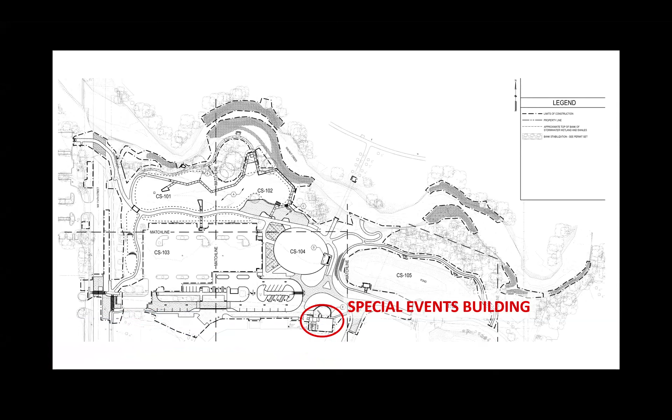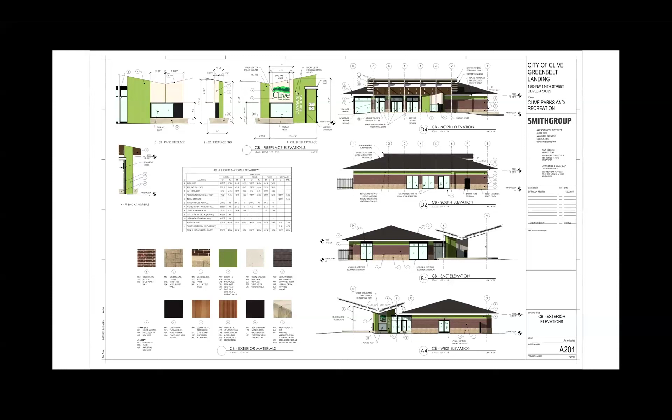The first aspect of the project is the special events building getting some renovation. Can you skip ahead, Richard, to the next one? This is the renderings of the building. I know we've also seen those in our video marketing in more of a 3D mode, but the improvements are largely off of the north side of the building, adding a vestibule area and then a rooftop screened seating area and patio. Next slide.

One of the outstanding items will of course be the construction drawings, review and approval. Those typically come in after the site plans are approved. So we'll have more details on exactly what is happening for stream bank stabilization once those plan sets are received. You can also see the creation of the wetland area toward the left of the screen and the boardwalk going throughout that area.

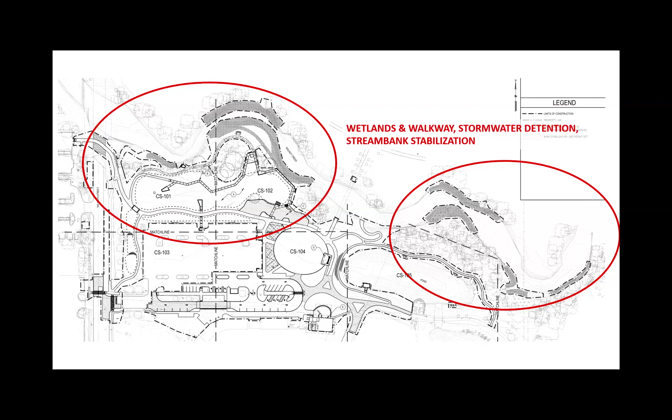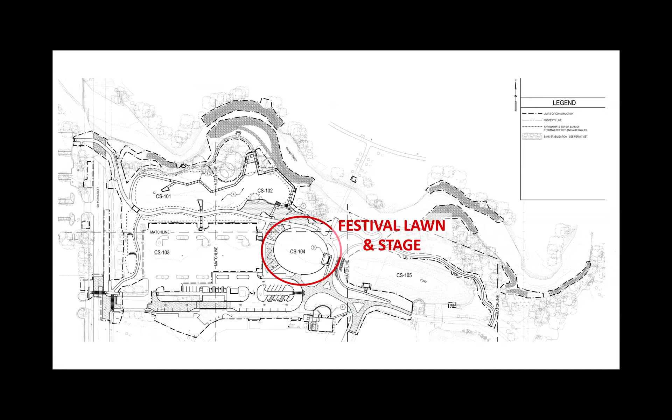Next slide. And one more there. The third big component of the project is the festival lawn and stage. That's the central portion right off of where the existing parking ends. You can see the stage here.

We have the 3D rendering, but from the plans, it is at grade, which is what is shown in the plan documents being approved tonight. The other rendering was from some of the promotional materials, but it'll be a nice lawn space and stage for events like Clive Fest and other community use.

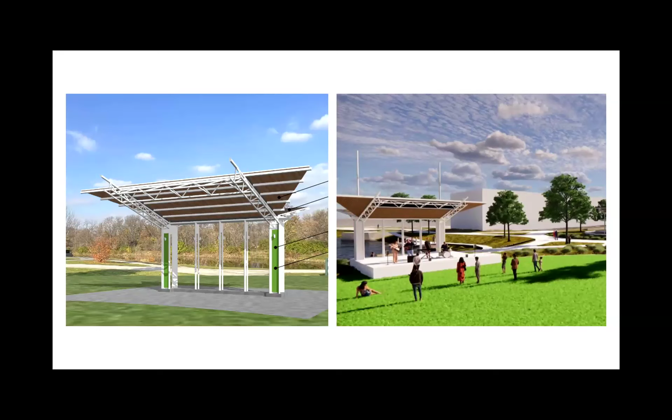Is that stage elevated then? We're seeing a couple of different things. In the plan set, it is not shown as being elevated. Part of it is doing a little bit of grading, so it's a little elevated, but not fully elevated like that. Part of that relates to being within the floodplain and the floodway, where we have to keep it as low as possible so we don't create any additional obstructions. Have we thought about any consequences with that? I know SmithGroup is working really hard to make sure it does have a little elevation over the rest of the lawn so that it's not sitting flat.

Richard, there would still be an opportunity to have temporary risers for certain types of shows if that was needed. Yeah, absolutely. Or the lawn grade itself going up a bit. Yeah, it looks like that on the right side. I know that's a rendering from the promotional piece, but it's part of how the grading is going to end up ultimately, so I think we should be okay from the perspective of people viewing concerts and things like that.

And that's my concern too. I want to get away from having to rent risers or stages for this. That's one of the ideas behind the whole concept, getting away from having to do that annual rental. Yes, and that's the intent, that we won't need to rent them for that, but the stage will allow it if we need to for some reason, or if we need to extend it out front for a bigger concert.

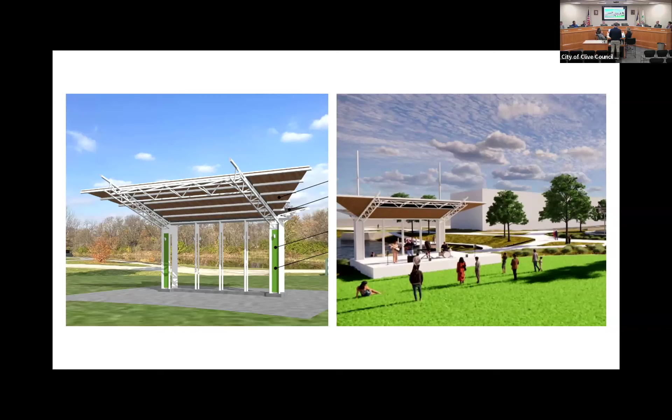Okay, so I'm not hearing any additional questions on that area. So one more click. And I believe we were talking about the playground location.

It's a quite large area. The site plan sheet that shows the whole site is fairly small, but there's a zoomed in view that shows, I believe at this point, a concept for the playground equipment. I'd have to defer to Richard to talk about which specific structures were selected to be put in there.

You can see that's the area it's located off of. There's some seating nearby, just off the festival lawn. It is near to the parking, as well as to the trail, so it should have good access for families and others using the space.

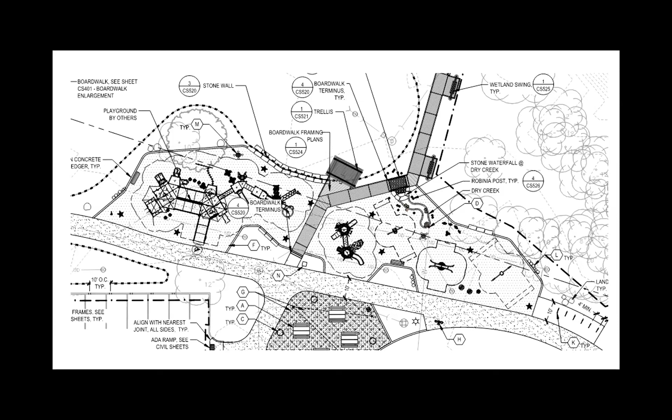Richard, I know we've talked about the concepts and the equipment on there. What kind of input did we get from the community on what we chose for the playground?

So we haven't had any specific conversations with a wider community on that. What we did, at least from the perspective of all-inclusive, all-ages, all-abilities, we worked with a designer that specializes in designing that type of playground to make sure we hit all the different elements—people with physical or other types of disabilities, people that have trouble walking, how people of all ages from half a year old to 80 years old can interact with that. So we did work with them on that type of design, but we haven't done a specific public meeting on what people would want to see in it.

Is that the Ashley Okland? Yep, correct. This will be the largest, I think—actually pretty close—all-inclusive playground. And I'll have renderings in a few more slides after Amanda's done her slides.

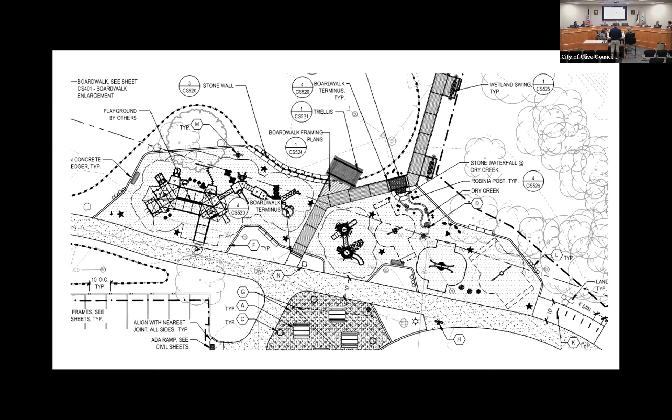Can we take a step backwards and go to the stage area? I really want to focus on—no, you can go to that next one, the parking lot. I get it. I understand the parking, I understand at the festival we don't have enough parking, but that's always going to be a problem regardless, right? Absolutely, for a big event like that.

Do we really need that much concrete? It seems like we need more grass and grounds, and we can park folks to the south and across the street—you're doing that anyway. So do we need all that concrete sitting there for 98% of the year? It's just running off into the creek. Can't we creep some green space into that parking?

I would say there's not actually very much additional concrete with the parking lot. It's more in how it's oriented and how we're improving the function through it. To the main extent, it actually almost extends all the way down to the special events building now, but it's not very easy to use—it's difficult to get there. So most of the work we're doing to the parking lot is increasing the functionality of how it flows. It looks like a little bit more concrete in how it's broken up and how we get that turnaround by the special events building, but from a functional standpoint, it's not a lot of additional concrete.

I'm just talking about the concrete to the north of that parking lot, not the new flow, because the flow today really stinks. Yeah, absolutely, we get that—big need. But the concrete to the north, I don't even know where to tell you—straight over from CS 104, and you come over—that concrete's never used, maybe 2% of the time.

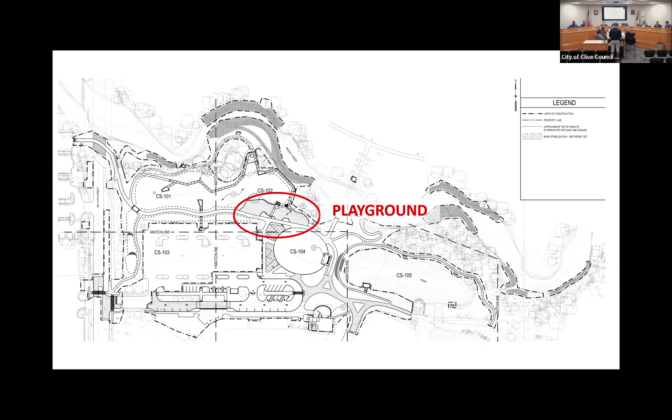And of course the boardwalks within the wetland areas are also a pedestrian addition, but we've already discussed those. So with that, this is a really exciting project with lots of great things to help enhance the area.

We did have discussions with Richard's team for the Parks, Recreation and Public Art Board on this project at their meetings in September and January. The Planning and Zoning Commission considered the site plan at their January 4th meeting and recommended approval. Staff did not receive any comments through the site plan process.

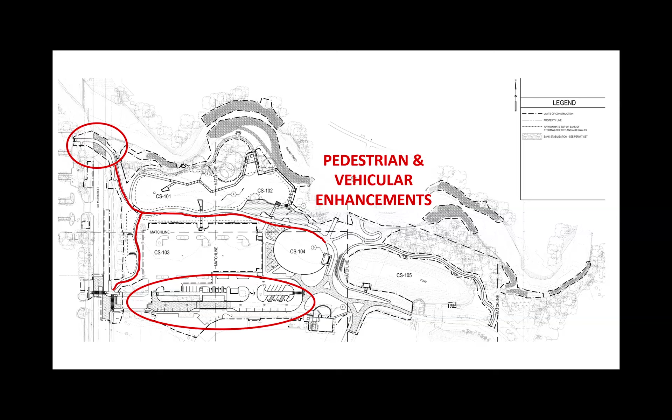I'm sure Richard may have comments on the other engagement they've done. With that, staff does recommend approval. The outstanding comments in the comment letter are all additional details that will be addressed with the construction drawing submittal. This project is a little different in that it's really all public improvement, so some of those details are still being finalized for the final review, but the site plan is not expected to have any significant changes.

Excited about the whole project, but on the building, I think there are some great enhancements. I think we're going to see more rentals for the space as we look at the enhancements to the outdoor space, like the outdoor fire pit. In addition, what are we doing on the inside? I know we're doing some modifications there—Rich, could you talk more about that?

Yeah, I'd be happy to. Actually, that's the first item on the project update. That's a perfect tee off. So Amanda gets the boring construction drawing and site plan documents—I get all the color and fun stuff here.

So the first one is the community building renovations. This gives you a feel for what it's going to look like coming in from the parking lot—the existing building on the right-hand side and the new covered patio to the north of it. A couple of things are different from how it functions now. If you're paying attention, you'll notice the band right below the roof on the aquatic center is blue out there now; that will be transitioned to a green tile as part of this, to tie more into the city's brand and colors.

A couple other things out here: we're going to move the main entrance from the side, which you can see is the restroom sign door there now.

That will become a public restroom for both facilities, and when it's not being rented, it'll be able to be used by the public. The design allows us to separate that use. And then the main entrance will be straight in here with a new double doorway.

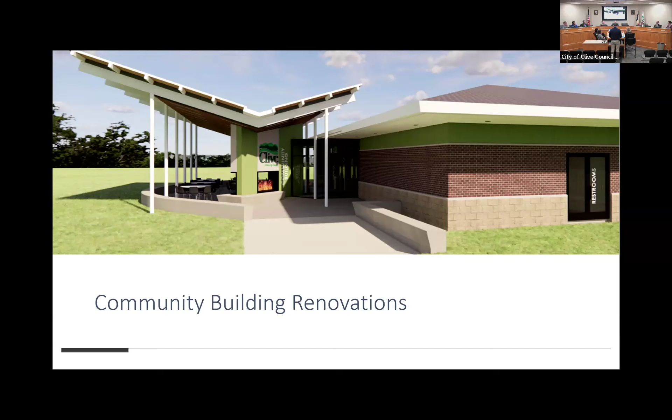So for what you see here, we wanted to at least put a standard name to it, again moving away from the special events piece. Community building is what a lot of communities are used to calling their main community center, and we wanted to see what opportunities we'd have in the future for that to change. But it was very important for us to have that visual change too, to make it easier for people to know where the building is at, because that's been a struggle since it's been built.

From a fundraiser perspective, have we thought about, oftentimes they'll have bricks where the public can buy a brick and put their name or their family's name on it? Have we thought about any opportunities to do that as well?

Save that thought, because you're going to hear related to the wetland walkway. I don't want to get ahead.

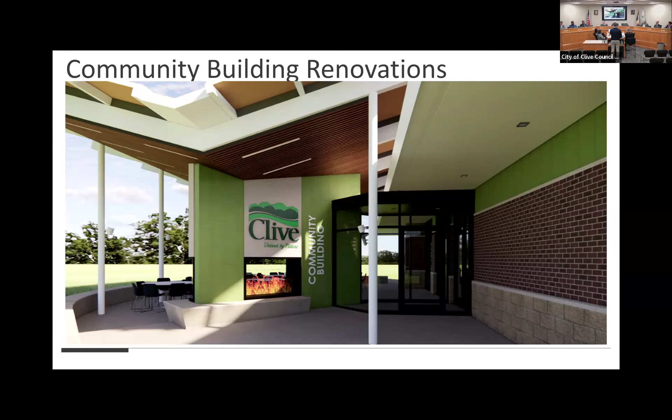Weaver, you're looking at the patio, right, and how it orients out to that parade field type thing so that onlookers can watch me whoop you in bags in the future. So keep that in mind, the permanent bag section, at some point.

One thing I'll say before moving on to the next part of the project, this plan overview shows the doorway here, so the restrooms can be separated from that, open to the public. You can also see what that little seat wall does to define that room as part of the space.

In most weather, it could effectively double the amount of space the building can have for people and events. Right now, our capacity is 120, but you could easily have events with 200 people show up and not feel crowded. So that's a nice space.

That wall also helps define it from the rest of the site, so it feels a little more private if you're renting the facility. It also provides more seating too—it's basically a seat wall.

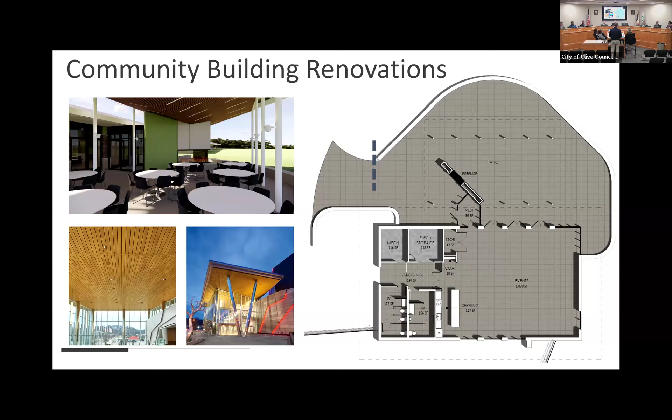So moving on to the stage and festival grounds, this gives you an orientation of how the design of the stage itself mimics and works together with the new patio over the special events community building, whatever we're going to eventually call it.

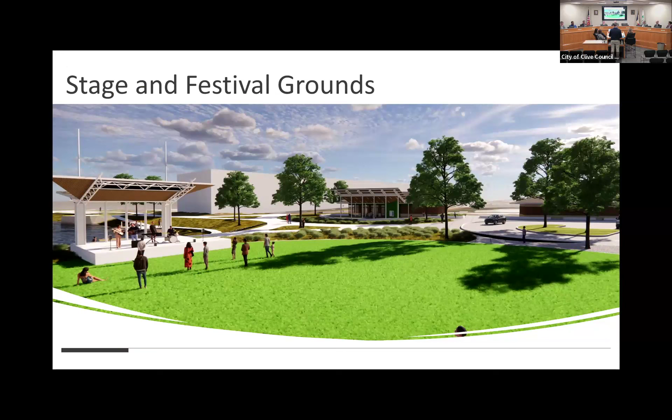Greenbelt Center. Then moving to the west-northwest here, this is the wetland and wetland walk area.

Amanda talked a lot about this, but it'll be a really great experience in a lot of different ways that doesn't exist within our park system. There are very few experiences like this within central Iowa, and it'll be a nice, unique attraction that brings more people to this site. Part of this is creating this place, this community.

It's been very one-dimensional up to this point with the pool. This will start to take it further, where maybe you come to the pool, go outside and have lunch. We might invite ice cream trucks over the lunch hour during a hot summer day. They're out there playing on the playground right there, or maybe they want to go for a walk.

On this wetland walkway. The cool thing about this is there's going to be a lot of different places to sit, interact, and give you different views of the creek, of the greenbelt. You're going to get different experiences.

There are places where you'll walk through the mature trees that exist out there today and will stay after this is over. You'll be able to get down—most of that wetland will actually have standing water throughout the year, and the boardwalk will get within 12 to 18 inches of that on a regular day. So you'll get different experiences that you don't get out there today, or pretty much anywhere in central Iowa.

So it's going to be a really unique opportunity that starts to extend the amount of time and people that come to this site and really can enjoy it throughout the year.

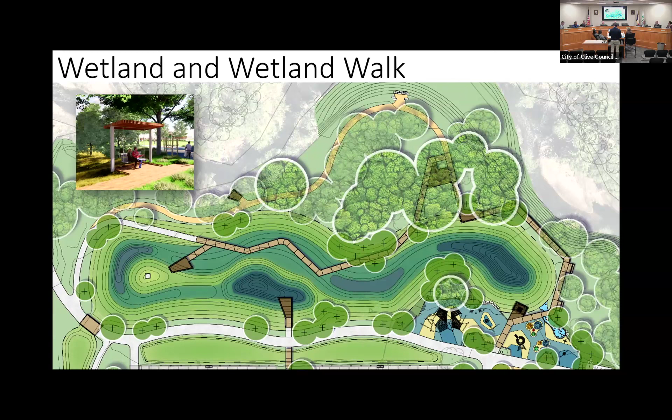Which one's the fishing pier, Richard? The fishing pier will be located off the pond to the east of the stage. So no fishing pier here, but it'll be just to the east of the stage. You looking for the boat launch or the fishing? The fishing, but that's right behind the stage. Yeah, so the pond will actually be where we do the fishing pier. Then it'll be fully accessible, so anyone can get down there and it'll really be a nice amenity.

And Michael, you said the boat launch, that's part of the Icon Trail. Yes. How does that fit into this whole equation? I'm not sure, actually—I'll go back real quick.

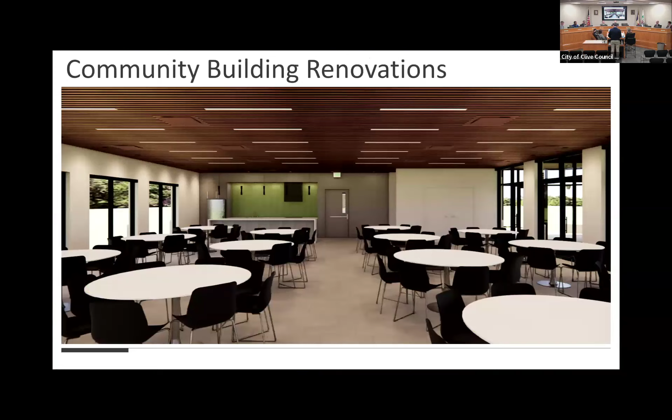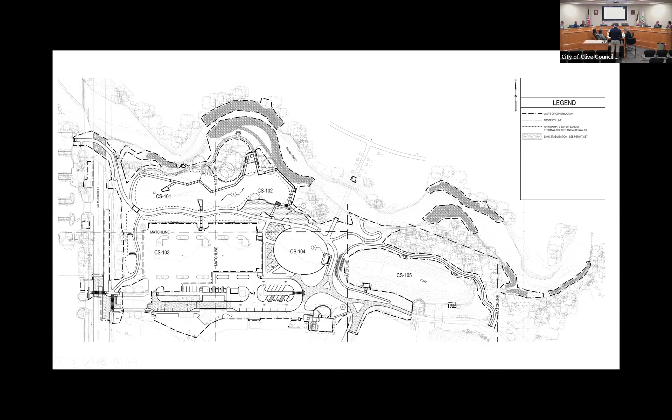So here's the wetland walk and the boardwalk there. Here's the bridge that currently crosses Walnut Creek, the trail bridge. The creek access, kayak launch, tube launch—just access down to Walnut Creek—will be just off the end of that, winding its way down and dumping out into Walnut Creek. The cool thing is the way the sandbars have set up, this will just end at a sandbar that's typically out there most of the time, so people will be able to get out there and explore, providing a nice opportunity to access Walnut Creek. And the fishing pier is right here at the southwest corner of the pond.

One thing I'll mention too, is the Polk County Wetland Walkway, because they've sponsored that. It's the MidAmerican Stage, they've sponsored that. And then the Polk County Festival Grounds. And the launch is Icon, and they didn't actually ask for any naming recognition, but they paid for it with their grant. They don't have any naming rights to it, but that was supported.

And then we also still have, as Richard will get to at the end with all the fundraising that's been done, a public art grant from Bravo and Icon to tie with the MidAmerican or CMIC grant or donation related to public art. So some pretty big partners.

What do we have left then, Matt? He's got his last slide covers that. So that'll be in my pitch for the last couple bucks. That's right, a couple slides ahead of everyone.

So Amanda alluded to the rendering for the playground. This is the proposed playground out here, again working to go with the Clive theme and some of the nature. So we picked colors that weren't too bright and obnoxious, like you can see, and there's nothing wrong with that, but it just felt like that was the right place for that out here.

So picking a theme that really works with the Greenbelt and the nature, and then also tying back into the Greenbelt Master Plan districts. So this being the Oxbow district, we're really trying to look at, even with the musical play, having it mimic natural things like mushrooms and flowers and those type of things.

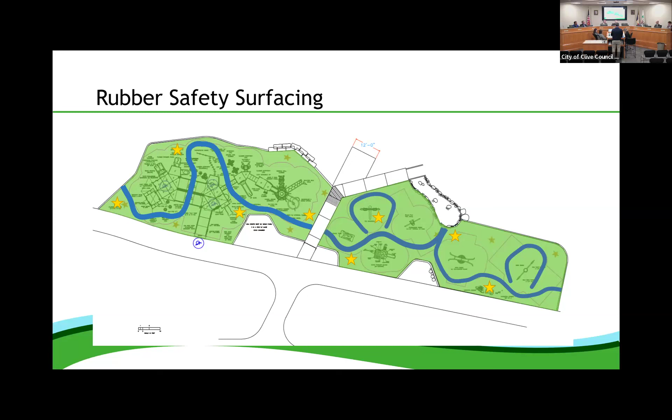So the next element of this is the food truck grove. This is an area just on the west side of the event lawn, and it basically parallels that east edge of the parking lot.

This is basically a little informal seating area with some permanent picnic benches out there, some kind of cantina style lights that will hang from poles just above that. It's a place that people can hang out during events, or if they just want to come have lunch. Hopefully this will be right next to where we do the food trucks, so that can mingle back and forth with people, inviting more food trucks and more people to come out, creating that larger community destination on a regular basis.

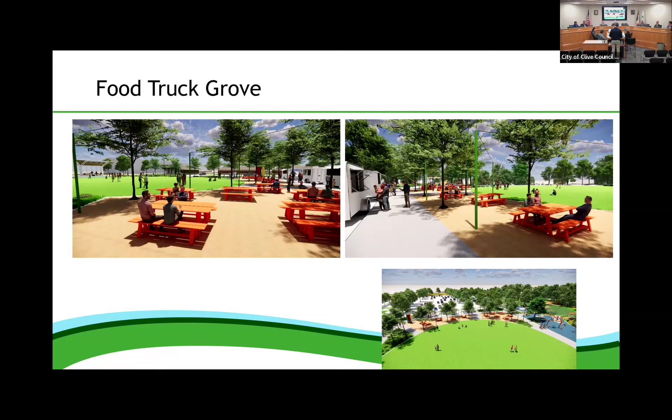So kind of jumping into project budget, like you asked about. Total, we're still sitting at the $10.6 million estimated cost for that, all design, contingency, all of those things. Total funding, we have well over 9.5 million committed right now. We're actually probably closer to the neighborhood of 10 to 10.1 of committed dollars, as well as in-hand funding from the city's funding and grants that we already have.

This is a list of all the major donations, grants, and partners that we have on this so far. You can see, like Matt talked about, the estimated cost of the playground from the in-kind donation from Variety. We have grants from Iowa Finance Authority, EPA for their water quality grant that Pete was able to work with our congressional delegation to get approved last year.

I wanted to note the Clive Community Foundation and all the effort they've been putting into this. While their contribution doesn't maybe come as direct dollars from them, they've been instrumental in making connections in the community, getting us in doors, and really helping. Their commitment was 300,000, but really what they brought is a lot more than that, either through in-kind donations or help at events, opening those doors. Then you can see it goes all the way down to the $5,000, plus an additional 75 on top of that in smaller miscellaneous private donations, which gets us pretty close to where we're at.

Matt alluded to it, we're working on hopefully one final naming rights donation for the outdoor plaza that we can bring forward in the next month. We just submitted another grant to Destination Iowa for $500,000. We hope that if either or both of those are successful, it's really going to set us up for 100% success on this, and get us right out of the gate when we start construction.

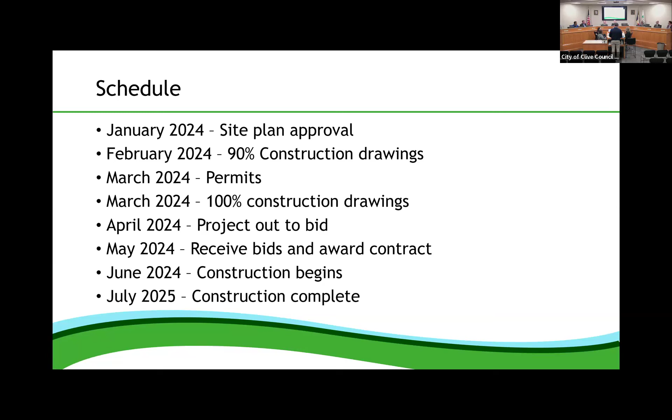With this construction schedule in mind, have we agreed on a final place to hold the 2024 Clive Festival? Yeah, that is the last thing. One of the things we thought about this whole—it just shows we anticipated the question.

One of the things we thought would be a possibility is that we could maybe have it at our current location in 2024, but with the parameter of not being able to do any parking lot work during the pool season, we didn't want to throw an additional restriction on there, especially because it'd be more important for us to have it completed and ready to use for the 2025 Clive Festival.

So our recommendation is that we move up the hill off of Campus Drive here for the 2024 season. This is just our first run at how we think that layout might work.

Up along that section, we'd close down Campus Drive from 114th over to the access into the gravel parking lot area. That's where the portable restrooms and food trucks would be. We'd have the vendors just south of that, and then this would be the festival area with the tents, the stage, and the beverages and other things you can purchase, or people you can stop by and talk to. Inflatables will be up here, and the slip and slide would continue to be at its typical location right here.

Actually, it gives us a little more room than we typically have down below, so we'll be able to spread out a bit, but it still works very well. We can still utilize all the same parking areas—the aquatic center lot and all the surrounding lots. The fireworks can still stay at the same location and might actually give people a better view being up on the hill a little bit, but I think it'll work out well for 2024.

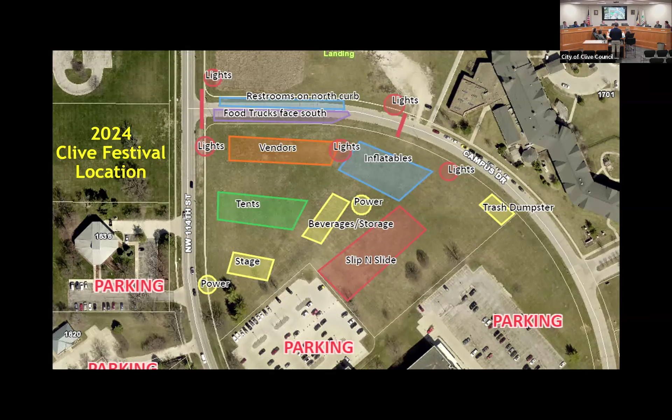I'll move approval of the site plan. Second. Further discussion? Seeing none, will the council please vote? Clerk, please post that vote. The site plan is approved by a vote of 5-0.

Continuing with Amanda, we have the Clive Development Standards Manual.

Proceed, Amanda. Yes, sorry, I was getting reconnected there.

So tonight we have to present to you the final version of the 2024 edition of the Clive Development Standards Manual.

This manual was last updated in 2000. So really the idea behind this update is to modernize some of our requirements because there have been changes in material standards and technology, as well as to address discrepancies we've had with various policies and changes over the last 20 plus years.

Additionally, we wanted to make it a little more user friendly, add some graphics, make it easier to navigate. So we've been able to bring in linking to other resources we reference, things of that nature.

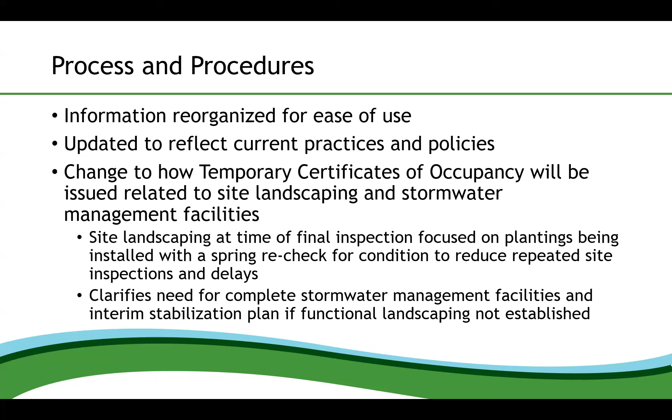The other sections are all related to the requirements and standards. So signs was a big one that we've talked about before.

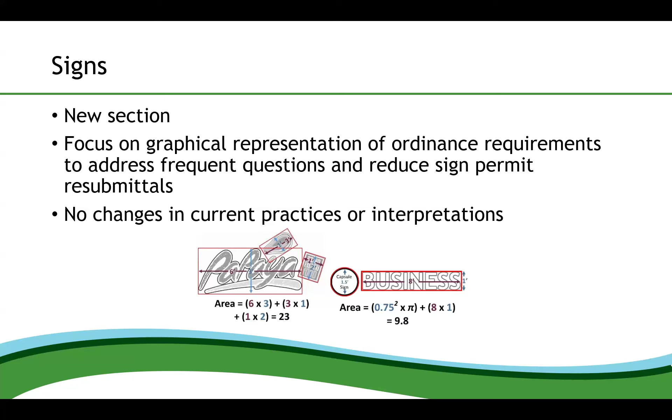This is a new section to the manual. The ordinance requirements and our interpretation policies are not changing at all from what we've discussed previously with the recent sign ordinance amendments. This really is just getting a lot of graphical representation, photo examples, things of that nature, to respond to the most frequent questions staff gets and the things we see as most often requiring a plan set to be resubmitted, causing multiple reviews on sign permits.

Site lighting, we've also discussed somewhat previously with various commercial site plans. So 20 some years ago, we didn't really have LED lights everywhere, so this update is really in response to getting to the current technology. We've also provided additional information on what to include specifically on plans with the development submittals.

That was another area where we were frequently having a lot of back and forth because applicants just weren't getting all of the necessary information together for staff to review the lighting plans. And we have been using this recommendation, or what we're recommending, with developers over the past year or so, and we have found that they've pretty much all been willing to implement that.

And we've been able to more or less ground truth that these are reasonable lighting standards to minimize the negative impacts on adjacent properties, particularly residential, while also keeping in mind that it is a suburban context that does require site lighting for all the vehicular travel.

Landscaping and open space. Again, this has all been reorganization and clarifying. There haven't really been any content changes, and that's because staff has not updated the landscaping ordinance yet in the zoning chapter, so we can't use a policy manual to change an ordinance requirement.

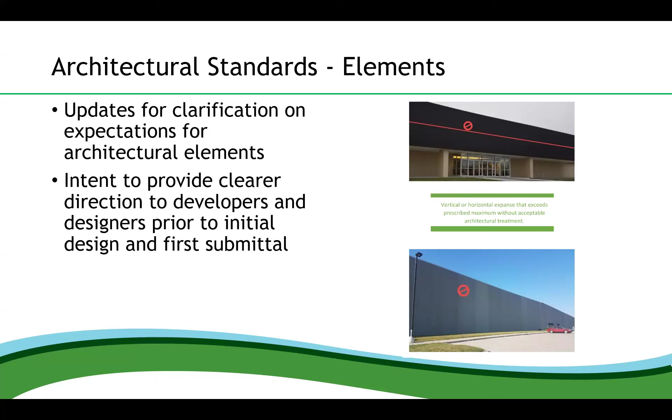So we have, again, a lot of visual examples in this. You can see a couple examples of the style of large expanse walls we do not want. And then it gets much more detailed into calling out different features and ways those can be utilized to break up the big massing on some of our suburban buildings.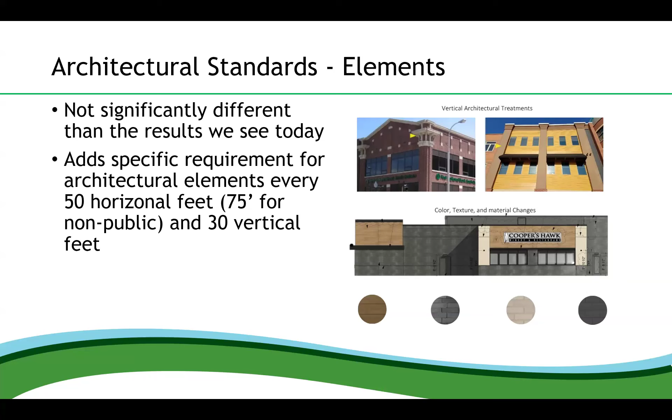The other big portion of the architectural standards is the exterior materials. Our current code limits new development to utilizing brick, stone, or similar substantial material. We get a lot of questions on what similar substantial material means - can they use Nichiha, can they use EIFS products, a lot of things that are not as robust as brick or stone, whether natural or manufactured. So our proposed manual is actually providing additional flexibility than what our current language has today.

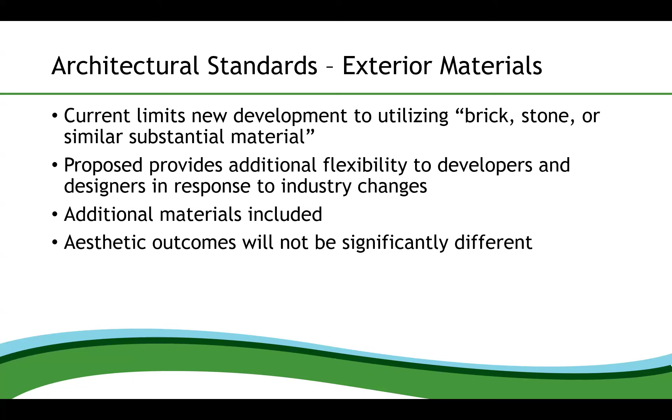We've included additional materials in our explanations of where those should land as far as a primary, secondary, or trim material. And again, the aesthetic outcomes are not intended or expected to be significantly different.

Additionally, staff has researched the ASTM material standards and found specific requirements to ensure things like thin veneer brick, which is now a much more robust material with better installation methods than it was 20 some years ago - however, that's if it's a fired brick meeting certain material standards, because you can still get an inferior quality thin veneer brick marketed for outdoor use. So we've put in specific requirements to allow those materials to be a primary, so we can ensure we're still getting the long-term durability and value out of them.

Now, I think many of you may be aware that there is a bill in the Iowa Senate right now, SF 174 I believe, related to exterior design elements for residential buildings, which does include multifamily up to 12 units. I don't think there's currently one with language addressing commercial, but there has been in the past. That bill is trying to remove governmental entities' ability to regulate exterior materials and design elements that are not either structurally required, or if the exterior material is listed in one of the national codes as being rated for exterior use - meaning we would not be able to tell a residential building they couldn't use those.

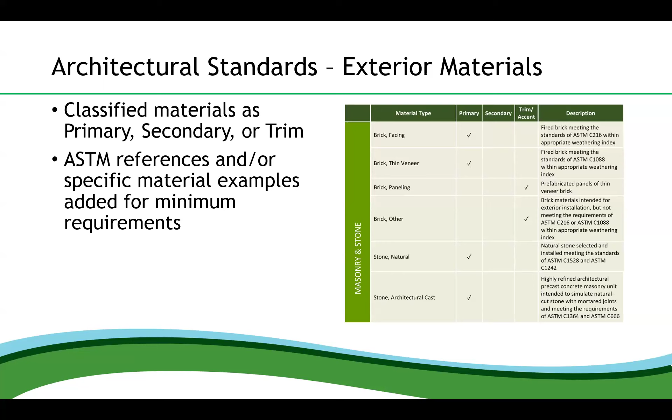So these standards we're talking about today are all commercial. They would also apply to multifamily, which is less of a concern since we don't have a lot of multifamily projects. That bill has been introduced, I think, in the previous 2 sessions as well, and hasn't made it all the way through. But staff does feel confident and comfortable recommending that we move forward with adoption here, particularly since this is actually giving additional flexibility. So we aren't making things more restrictive - if that were the case, we might want to hold off, but this is just clarifying and will actually give more options for developers and designers.

Site circulation and parking, similar to landscaping, there are really no content changes, because the ordinance has to be amended first, which is on the to-do list for strategic planning. We do expect we'll bring back a new version of the manual for this section in association with those ordinance updates. Then utility standards was a big lift.

That was a joint effort between planning, building, public works operations, engineering, and the fire department. There are a lot of various policies and things out there that we got all together and said, okay, what do we want our standard to be? And we did an update. So this should reflect what everyone's current preferences are for those policies and materials.

There are a couple instances where we do expect we will have to potentially make a change in the manual. There are some pending updates to SUDAS, the Statewide Urban Design and Specifications, as well as some pending updates that could impact PROWAG, the public right-of-way accessibility guidelines, which would have to do with pedestrian and sidewalks, things of that nature. Additionally, the MUTCD traffic manual also currently has pending updates.

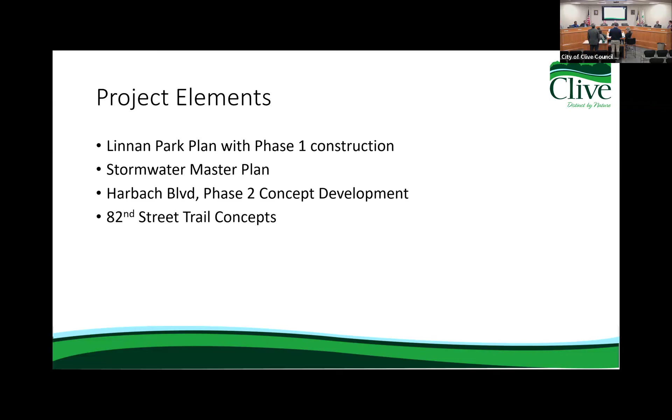Because of how we wanted to orient this to make sure we could start construction underway out there, this follows a bit of an atypical situation. So we're going to focus all on the park tonight, with a little high-level work on what they're learning on the stormwater related to the park, because that will relate potentially to some of the phase 1 improvements.

Just another quick refresher. This is where we started with Smith Group. This is the high-level concept plan for Linnan Park and the area around the Harbach Center that was done as part of the 86th Street neighborhoods plan. This was a starting spot for them, as well as the work that Pete, Amanda, and I did with the students at Crestview on what they would want to see in a larger park. So with that, I'll turn it over to Tom.

Thank you, Richard. Thanks everybody for being here tonight. I'll walk briefly through the process we've gone through so far, our recommendations for the overall approach to the park, and then some of the information we have on the master plan.

So we sat down with city staff to look at, starting with where Richard showed you, the larger scale plan. We started asking what we really want to happen with this park now and in the future, and what's really happening right now — how does everything work, how does this fit together, and what are your needs? We developed a list of goals and objectives that we then used to study some alternatives for the park.

I'll walk you through all of that. The biggest thing we heard was to create a future-focused plan — not just add on to what was there, but really think about long-term needs, both for the park itself and for the neighborhood, and how this can contribute to them.

So that means the park itself needs to be flexible and adaptable as it develops. We need to match amenities with neighborhood needs and create that flexibility over time, and then look at the short-term and long-term strategy for the Harbach Center. I'll show you how we've explored some of those options.

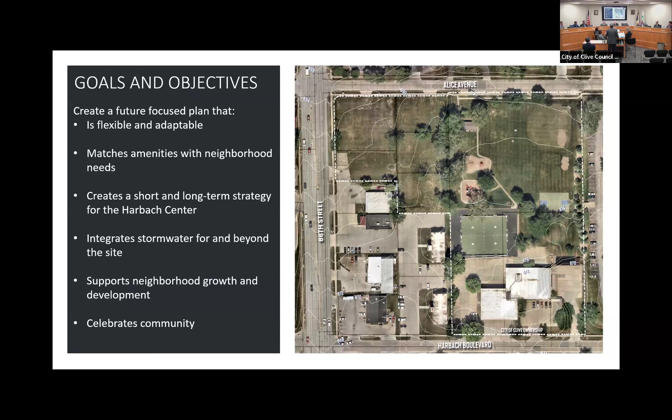Also integrating stormwater for the park, but also beyond the site, thinking about this as a catalyst for adjacent development — showing improvement to this property, and then how we can contribute to adjacent areas, support neighborhood growth and development, and celebrate community. This is really a community-focused space.

So we started with ideas of how we can handle the Harbach Center — what are minimal impacts we can make, how do we do an insertion with what's there versus a bigger, more maximal impact, and what benefit can we get if we look a bit beyond that.

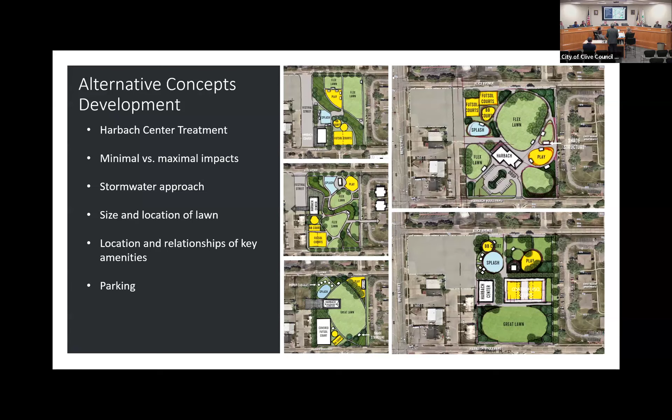How can we handle stormwater? How does it move across the site? If we have a large gathering area like a lawn, how big does that need to be? You can see some of these are large spaces, some are a few smaller ones. And then the location and relationships of these key amenities, and how parking fits with the site.

We narrowed that down to three overall concepts. The first, on the left, we called stormwater as an organizer — really looking at how stormwater moves through the site. We already know there are flooding issues at the Harbach Center, which is at the low point of the site, and in a big rain event it backs up into there. So where does water enter the site, and how does it naturally move through and design around where it wants to go?

Second, we really focused on building on the Harbach Center itself. What if it stays there? What if it's remodeled? How can we build around that, and what can it really be?

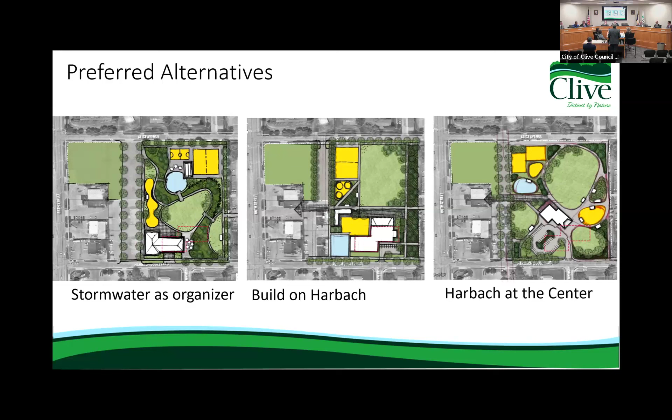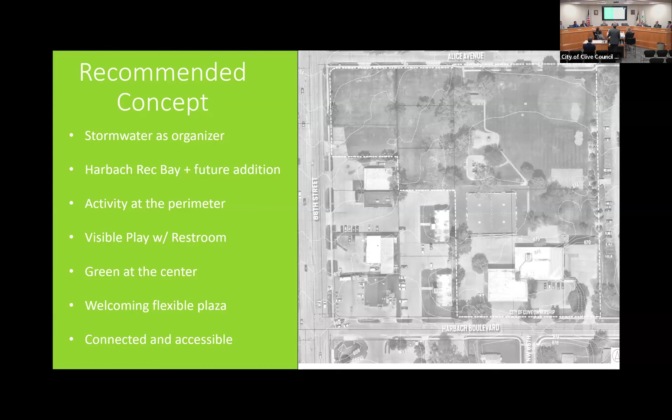And the third, we said, what if we move it all together? What advantages come out of that? So from that, we developed recommendations for the concept, and we really started to hone in on an overall organization for the site. I'll walk you through that very briefly.

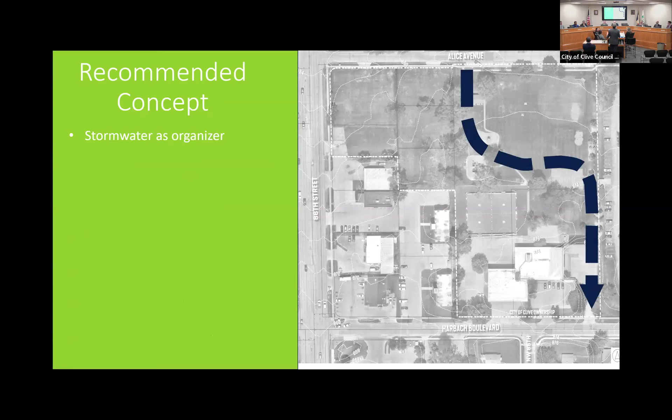First, we really like the idea of stormwater as an organizer. It's a really important component of what needs to happen here. It lets us develop on the site in a really interesting way, and it lets us contribute to what's offsite as well. We really like the tie to one of your greatest assets, the Greenbelt itself, and how we're prioritizing stormwater as part of the context and design of the site. It's not just how we're moving water, it's actually an amenity for this park.

Second, looking at the Harbach Center, there's really a range of possibilities, from taking the building you have and remodeling it to completely removing the building, and everything in between. What made the most sense is the location in the southwest corner of the site. The most flexible part of that building is the rec bay facility that's there. The other part, the northeast part, is the hardest to redevelop because of the way it's laid out and formatted.

So there's an opportunity to reuse that rec bay site and potentially add a future addition onto that. In the development, we're looking at moving from north to south, so that's something that can evolve and happen over time, giving you some flexibility for how that might work.

Next, we talked about the active amenities on site - futsal, basketball, and what else we want to include - really pushing those to the perimeter so they're active and visible and seen by the community, so they can see all of that great activity happening.

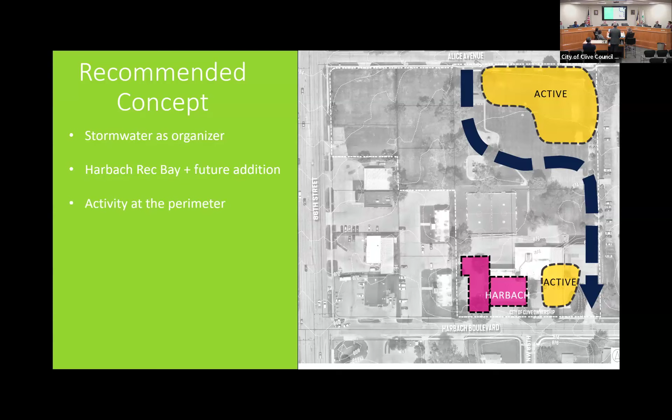Connecting play with that as well, making sure that's at the perimeter and combining play, both playground and splash play, with a restroom, using that restroom to buffer between the play spaces, which are typically oriented towards younger kids, and the active spaces, which can range in the ages they're used for.

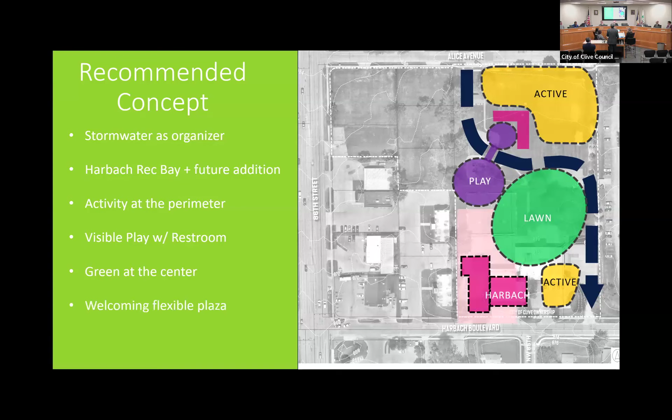Putting a green or gathering area at the center of the space that everything rotates around, and then a welcoming, flexible plaza that can connect to the site, the future development site, or the existing and potentially future redevelopment site to the west, and really be connected and accessible to the neighborhood. This park should be a catalyst for what can happen in the community and how everybody can come together, making sure there's lots of ways to get in and out of this facility and really making it more connected to the neighborhood.

In addition to that, we've been working on the idea of a festival street on the west side that could also do some stormwater management, and keeping the northwest parcel open and green for the time being. That does offer a flexible lawn area that can be used.

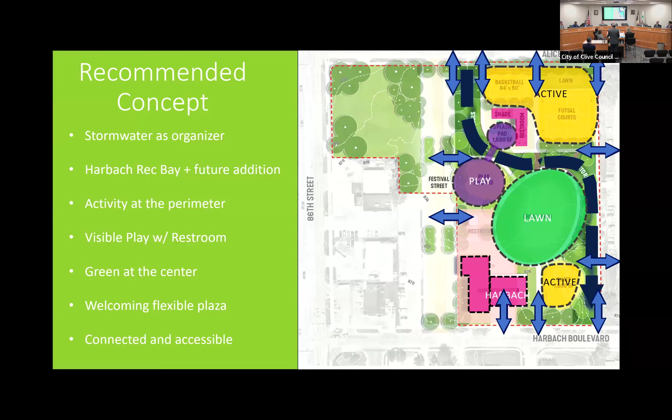Jay Blue is online, and he's a landscape architect, project manager for the project. He's going to walk through some of the more detailed pieces of the design itself. Just like Amanda and Richard earlier, I get to present the pretty picture stuff. Thanks for letting me join you online - I really appreciate the opportunity to be with you tonight.

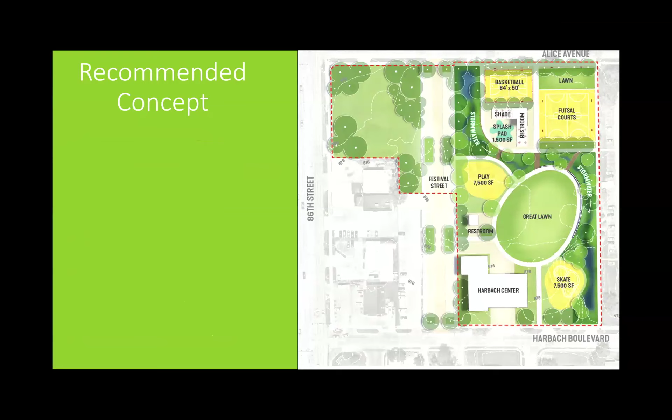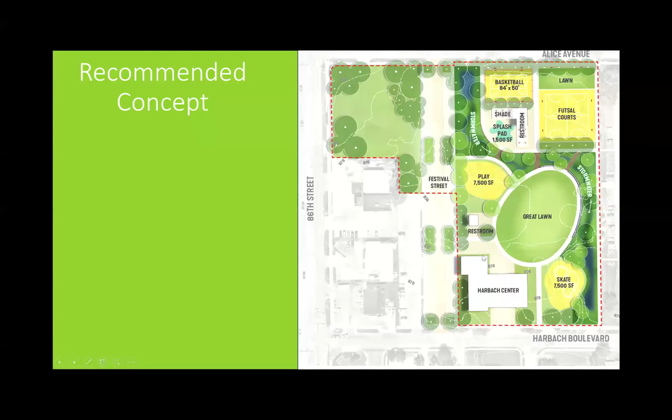What's happening here is that the right side of the Harbach Center has been removed - it basically would have overlapped in that zone someone just circled for us. The old fire station, or fire truck parking area, which is now a rec bay, stays and is remodeled, and we look at creating some sort of new mass on the left side. This is just a placeholder - we don't know what that looks like yet, it hasn't been programmed, but this might be one solution for how we look at retooling the Harbach Center.

So if we jump to the next slide, I think it's always easier to see these kinds of spaces in 3D.

Here's what this space might look like. You can see that great lawn space in the middle, with people playing futsal and basketball. There's people at the playground, food trucks parked by the Harbach Center, and people using the skate park. This gives you a good sense three-dimensionally of what that space might be like, with room for a lot of vibrancy, activity, and fun at this updated Lannan Park.

Next slide, please. All right, diagrammatically, this is what we did.

Here's a good example of the old Harbach Center right there. You can see how far that existing structure projects today to the right, to the east, and to the north, and the existing parking area.

We're really trying to take advantage of the natural flow of the stormwater and pull that stormwater to the low point, basically down where that parking lot is. It actually receives a little water because Harbach Boulevard is high, so water drains in from Harbach Boulevard and from the site today, right down where the parking lot meets the building at the old police station lower level.

You can see the festival street that we're showing here. We just took a swag at it by showing approximately 90 spaces. Right at the core, you've got the great lawn, a new playground area, and a splash play area with restrooms and a shade structure.

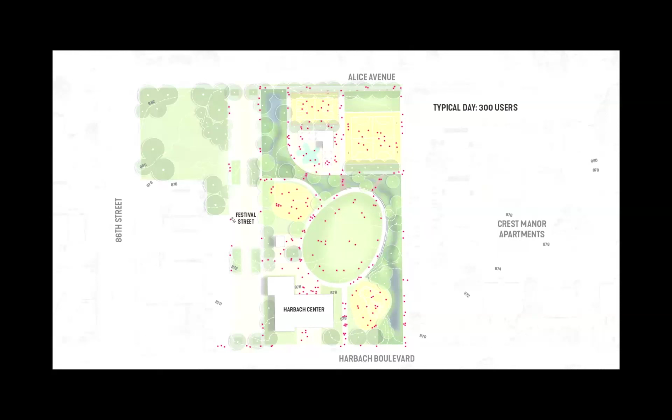So if we were to look at a special event, maybe here's a concert. What happens if we hosted a concert off the back of the Harbach Center? You can see we've shown a little stage space back there. We use that great lawn for lawn seating for people to view the performers. You've got some food trucks parked by Harbach Center, with 650 users out there.

You can still have people at the playground, at the splash pad, and people can still be up playing basketball or futsal or on the skate park portion, and it doesn't feel congested, and they're not interrupting that concert experience. You still have the flexibility for lots of things to be taking place.

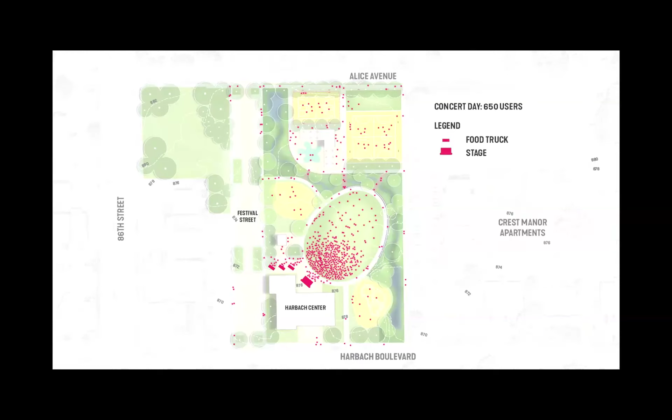If we look at one more image, this is just what it might be if you had a festival day out there. Here you can see we've got almost 850 people. Taking advantage of that festival street, you've got large tents and small tents parked on the festival street. There might be additional food trucks parked out there, maybe some tents on the great lawn.

You could see you don't lose any of the opportunity for people to access and take advantage of the playground, the splash pad, the basketball courts, the futsal areas, the skate parks. All of these experiences can happen, still get to the Harbach Center, still get to the library that's in there, still get to the rec bay, and have these kinds of experiences while maintaining the flexibility that we heard was so important to this park.

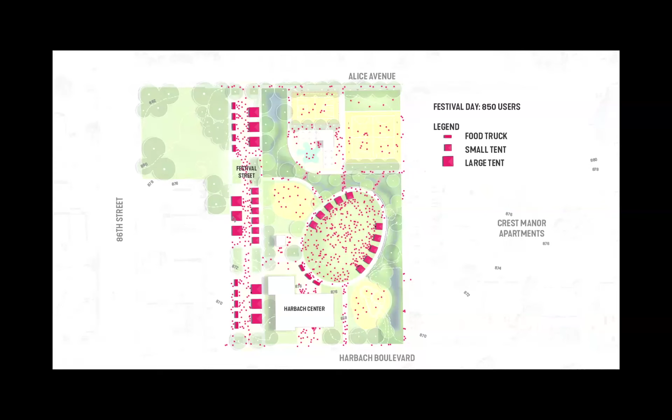Hello, thanks for having me. So one of the opportunities with this park was also to use the area to manage off-site water, essentially as a way to retrofit a larger portion of the upstream watershed. What we're currently tentatively planning is shown in this exhibit: the large blue areas are the larger watersheds, and that cyan shape captures water and brings it right on the north side of the park, then transitions to the east side and runs south. That area is 6.5 acres, and we currently have a preliminary plan for what we might be able to do with that water.

If we go to the next slide. Fortunately, the site does have fall from north to south, however the existing stormwater infrastructure is very shallow, so we don't have a great opportunity to put in a deep vault for capturing and retaining flood water from larger storms and slowing it down before it reaches the rest of the system and ultimately Walnut Creek. But using a shallower system, we can actually capture water. What we're showing right now for that 6 acres is the pink 100 by 162 RainStorm system, which would be 4 feet high with 1 foot below for storage that could infiltrate into the native soils. That would be taken off of the existing blue pipe running right on the north side of the park, to be detained and infiltrate.

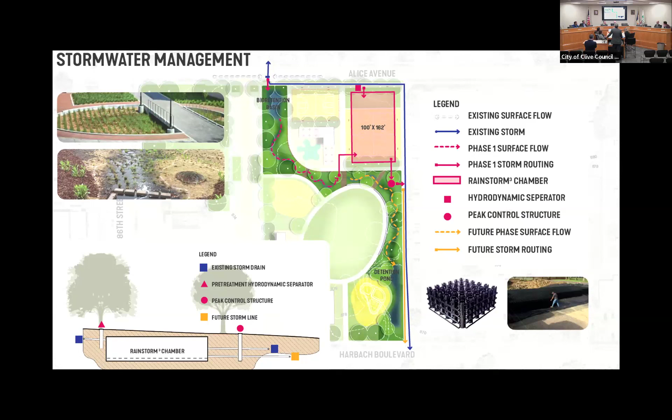Is this solved for the Hickman and Alice and 86th Street corner lots drainage, so it's buildable with this stormwater management model? Because we own it, we need to deal with it. And this needs to be an incentive, not a deterrent, for who we're trying to bring into that property. So it should be solved in this first phase to say, hey, it's ready to roll. Let somebody build, because we've taken care of your stormwater. We own it today, we should manage it.

So, do you want me to take that one, Jay? Yeah, go ahead, I'll jump in real quick, Tony, then have you fill in the details. From what I remember, the Festival Street is part of that concept because the drainage on that site doesn't flow east, it actually flows west. So one of the thoughts is the Festival Street could be done in pieces, having storage underneath the Festival Street to provide that additional stormwater management, because the site actually flows west towards 86th Street. Am I right on that, Tony?

Yeah, so looking at the exhibit still on the screen, if you look through the red to the blue line, that's the watershed divide. All of the Lanham Park north-south programming we've been talking about is essentially part of the major watershed to the east. However, future development on 86th is actually in a different watershed, and therefore the system we're proposing is useful for mitigating water that currently isn't treated for the eastern watershed, but a different mechanism would be necessary as an incentive for the western developments.

So we imagine that going into the Festival Street. But we need to solve for that today. We own the property, so why would we not solve for it today when we're already mobilizing people here? Let's not do another project in the future to solve for property we already own and should be taking care of.

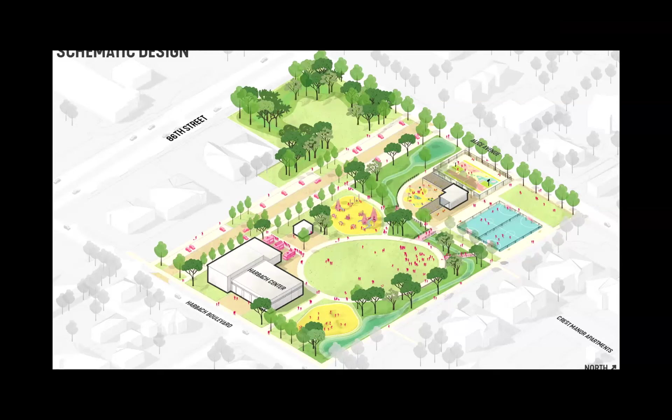You could have almost three soccer — and I know they're not setting up U8 regulation games out there, but you could basically have three games going sideways on that Great Lawn, just to give folks a sense of that scale.

What's the purpose of moving the futsal courts? You've got them right now — that seems like an added expense when we couldn't build around that right now. What's the purpose of moving it up to that corner?

A big part of that was that ultimately we're going to have to replace that. So we asked ourselves, as part of that design process, when we have to replace it, would that be the spot we put it, or would we think about putting it somewhere else if we're re-envisioning the entire park? So that's what we were thinking — if we re-envision the entire park, we'd probably move them to the area they proposed up there.

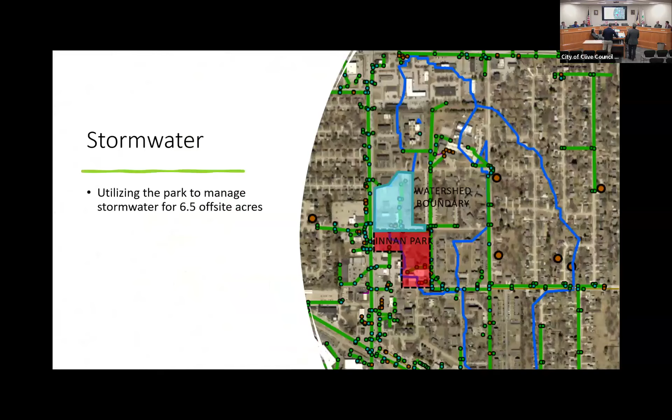That's also why in the proposed phasing, the initial phase wouldn't include moving them. That would give us potentially more time to get some key elements done with our first phase of construction, and then in a later phase we could move those and get a few more years out of the space we're at now.

Part of it is they just kind of sit in the middle of the park, and that created some more difficulties in creating a more cohesive layout for the park and how we wanted the activity to be oriented.

Part of our thought — and this is something I'm interested in further involving the stormwater piece of it — is because of the expense of the underground chambers, it's hard to move the futsal court up there if you know you're going to do some kind of underground work underneath it as well. Obviously, you don't want to move the courts and then decide to put the chambers underneath it and tear everything up. So one thing I'd like to explore — I'm getting the sense that we've got some more work to do with this, based on some of the council's comments — I'd welcome that direction on where you'd like to see changes or things go.

One thing we've been thinking about is looking at our CIP and our budget to find maybe ways, and grants, to potentially do the stormwater chamber right away with the phase 1 improvements, and move the futsal and basketball courts up there as part of phase 1, to open up more green space and tear out the concrete where they're at today, which we know will need to be addressed at some point. So can we add budget, particularly related to stormwater, knowing we're making an investment for the future for stormwater detention.

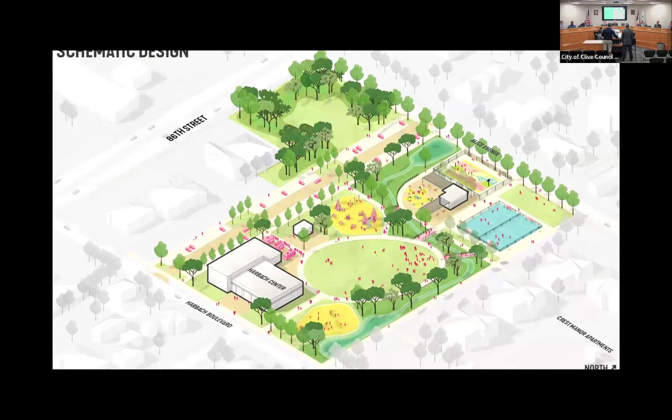So the one thing I wanted to be sensitive to is I know there was a desire in the council. We wanted to see something happen in this park in the short term, and so we wanted the park developed. In the past, we've wanted to see something. So, look, I probably should just be quiet, but again, it was appeasement after appeasement after appeasement.

Take the baseball court out - okay, that appeased us for a year because we wanted to see something. Take the baby pool out - that appeased us for a year because we wanted to see something. Give us one more year and we'll do the pitches, and then we'll do the whole thing.

I get it, look, I've got a lot of frustration. The business owner to the east needs to put some money up. This is a huge amenity that he's taken everything out of. It's disgusting to me, quite frankly, that he continues to pull his playgrounds out, his pools out, everything else out. And here we're building something for the neighborhood, and we're going to wait 2 to 3 years, mark my words, to make this deal for this eastern parking lot, right?

And that'd be a quick timeline. In the meantime, look, good enough is good enough. So to start putting in little things to appease - when I look at phase one, sorry about the soapbox, but I see phase one, I don't see anything different than today's park, other than a splash pad. Because we already have a shelter that's highly used. I mean, there's potlucks, there's electrical cords running from the rafters, literally, folks, come on out and see it. There's hundreds of people there.

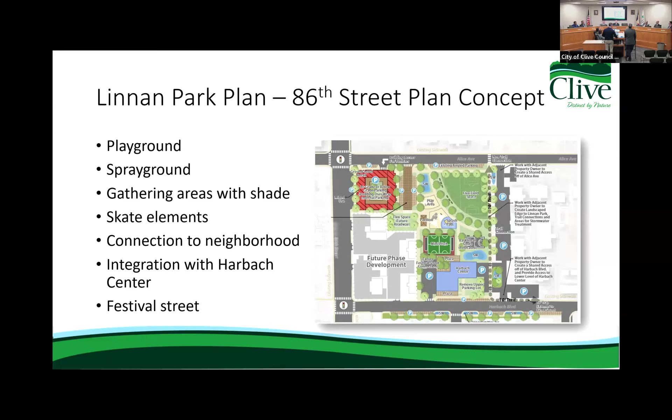Yeah, I think that's fair. I mean, I think it's a little unfair to say all we're doing is a splash pad. It's a $2.5 million redesign. It's phase one. I think what I'm skeptical of is the whole stormwater plan. I'm just giving an honest picture of what I'm doing. I'm not a big fan of that phase there. That green space here exists. This green space exists. This shelter exists.

Well, what I'm hearing from the council is if you could look at the whole project and come back with at least some kind of ballpark notion of what beyond the 2.5 is needed, so that we have some idea for planning purposes, minus the Harbach Center. Yep, up to the Harbach Center as you described. Yeah, I think that'd be helpful to the process.

Okay. And Councilman Weaver, building on your point, would you all like to seek alternate concepts for stormwater as well? I would. I'm skeptical. And again, I'm not a water engineer. I don't understand all the science behind it, but I'm very skeptical of that plan. I would like to see an option.

Okay, a couple of things. What else? Anything else? Maybe if I could just get some clarification from Councilmember Weaver, are you saying aesthetically that's the concern from the concept? I just want to make sure we can respond better to that. Are you saying you're concerned about the aesthetics of how it would look, what you're saying earlier with the muddiness? It's not just the aesthetics, but the function, with how the park will work with kids going back and forth in this area.

I know we're saying that the rainfall kind of goes that way now during rain events. Well, there aren't kids out playing soccer during rain events, right? And so what now, in my mind, what we're creating is kind of a constant, stagnant water, or an area that you're not wanting kids to traverse.

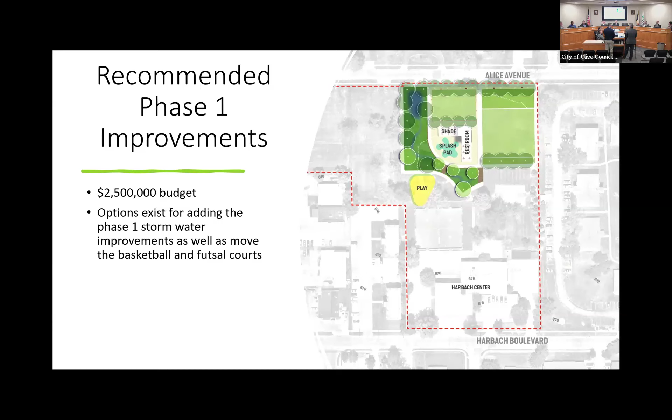And to the Great Lawn, I was hearing that perhaps we need more refinement so that some actual game pitches, whatever—yeah, and maybe one of the things we can do is on those drawings kind of hash out, like how big a soccer field would be on that, and some of those things. It's just making more of a decision around that Great Lawn. Do we want to allow that, or do we want to encourage that use there, or do we want to make a more dedicated space somewhere else?

Like, absolutely, up in the top. Perfect, and we can demonstrate how that lays out, how that fits in the overall context. And perhaps it's as easy as at Campbell, where you put up a volleyball court—they know to go to the volleyball court, right, and you don't have volleyball courts all over Campbell.

So maybe we put a regular—I call it hookah ball—courts up that say come here. It's up all night, it's all day through the summer. Path of least resistance, right?

Councilman McCoy, were you in the rest of the council as well? There was a question about sort of the research we've done on uses in the space. Are you all satisfied with the assessment that we've done, or do you need us to get more direction there? I think you know, get how it's used.

I think you've got a good assessment from sixth graders at Crestview. I don't know, whenever I see people out playing soccer, that's the main activity I see. It used to be. Absolutely.

And hookah ball is huge. I mean, it's huge. It is. It's very popular. They've got 3 courts every night, and they're muddy, which is fine. Yeah, it's weird because we've offered them nicer turf for them. They're like, no, we prefer it this way.

So yeah, it's a little bit odd because we, as parks people, tend to want to have the grass look good and be nice. But you give them new, better—that means seeding it or whatever—which means, in their head, you're closing them off from their area. If you look, they're in the same spot every time. And so towards the eastern part, you're telling them they've got to move, and now they're going to tear up that lawn. And now you're going to move them, and they're going to tear up that lawn. It's almost like they've created the dedicated dirt turf that they prefer.

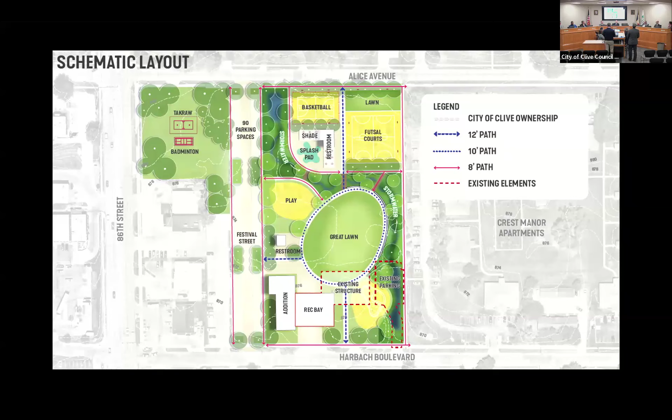Now we've been at this a while. Do we need to take a break, or how long, Stephanie, do you have a half hour, 45-minute presentation? No, we got about 5-10 minutes, and then questions. Plow through, okay.

My report, benefit of the library board members who have been sitting. You want to hear all about it in great detail. Can't wait.

All right, ready? We'll change subjects just a little bit here, from parks we'll go to libraries. Before I get started, I want to thank the multiple library board members here, and ask them to come out so you get a name and a face. I believe Joanna Gilmore is here in the audience, our newest library board member, very excited to be part of the library, and we'd love to have her the first couple months. There's probably a few of them online as well who weren't able to be here in person, but wanted to join and be part of the discussion. Finally we have Stephanie Keller, the library manager, and Terry Nelson, one of our full-time librarians here as well. You don't often see them unless you come into the library, hiding behind making sure it looks good and works well, so wanted to have them come out and be part of this.

Our intent tonight was to check back in with the council on the fine-free library pilot program that council approved starting July 1st of 2022. One of the things you asked us to do was come back after 18 months and say how has it gone, what have we learned, what happens next. The way we structured this pilot program was that we would be eliminating fines on traditional items, that's books and magazines. Fines would still be charged on a lot of other non-traditional things, like our video and board games, our makerspace library of things you can check out, those would still be subject to fines once overdue.